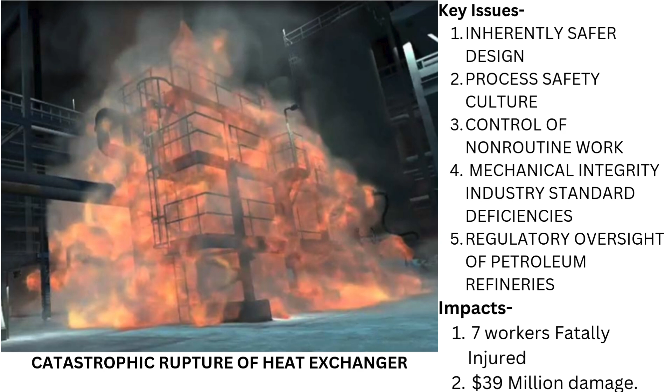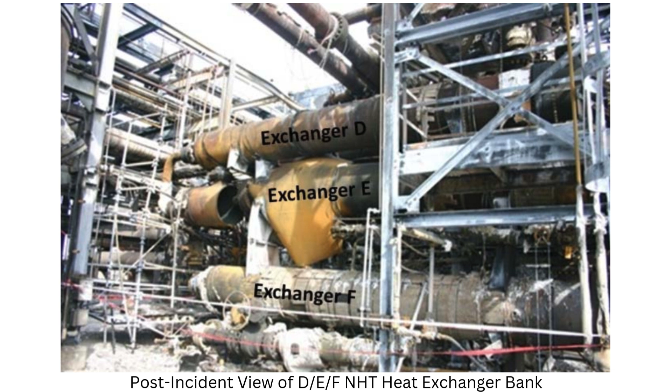On April 2, 2010, a catastrophic explosion rocked a refinery in Washington. A ruptured heat exchanger in the Naphtha Hydrotreater Unit, NHT, released highly flammable hydrogen and naphtha at over 500 degrees Fahrenheit, causing a massive explosion and fire. Tragically, 7 workers were fatally injured. The incident caused over $39 million in damages and is one of the deadliest refinery disasters in history.

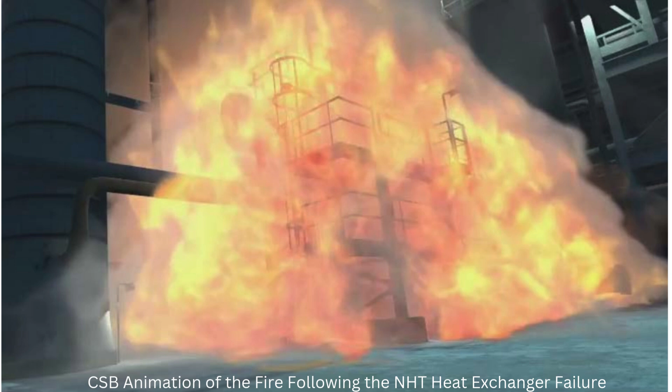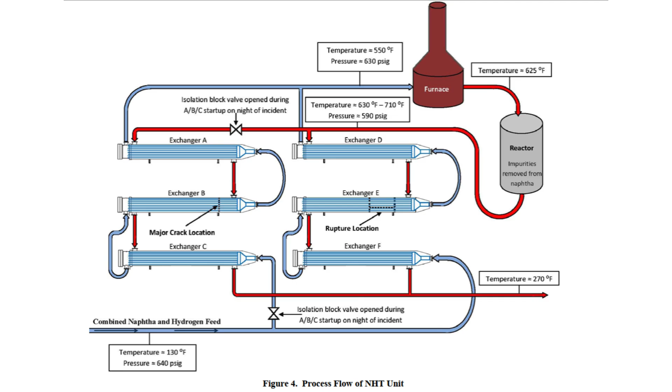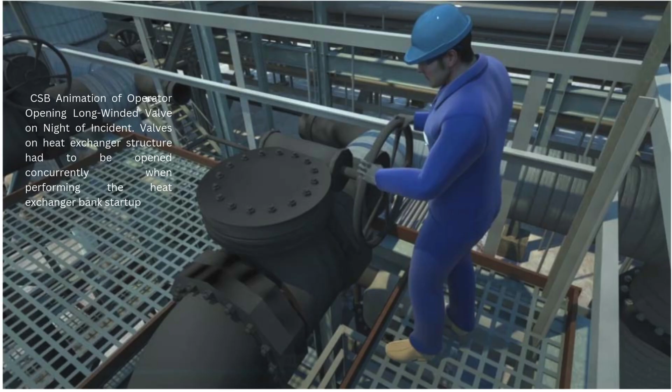What happened? On March 28, 2010, the A/B/C heat exchanger bank was taken offline for cleaning, while the D/E/F bank continued operating. Cleaning was part of routine maintenance to remove fouling that reduced efficiency. On April 1, workers began restarting the A/B/C exchangers. These startups were considered hazardous and non-routine, with a history of leaks and fires.

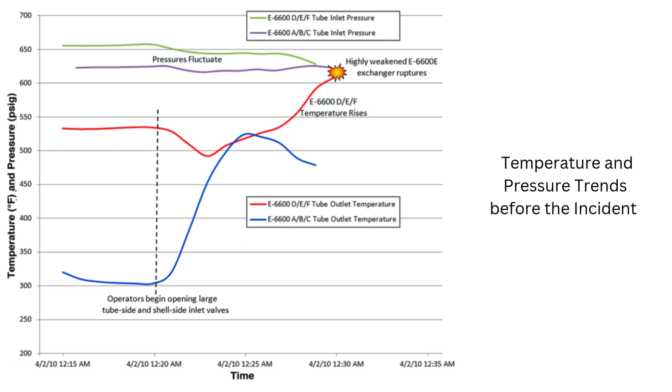On April 2, early morning, during the final stages of startup, workers manually adjusted valves to regulate the flow of hot naphtha and hydrogen. At 12:30 a.m., the heat exchanger in the D/E/F bank catastrophically ruptured due to severe high-temperature hydrogen attack, HTHA, releasing flammable gases that ignited. The resulting explosion and fire burned for over 3 hours, causing fatal injuries to 7 workers near the heat exchanger.

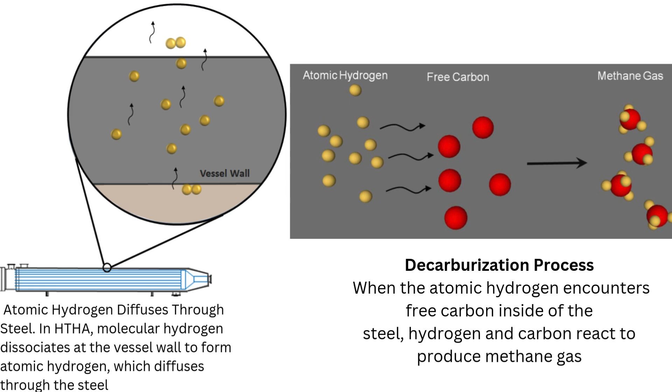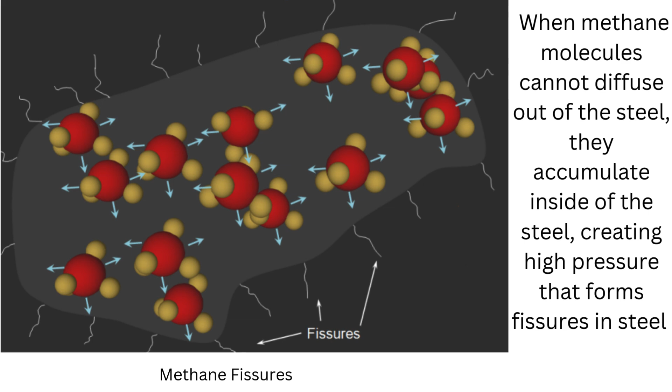What are the root causes? High-temperature hydrogen attack, HTHA. The carbon steel used in the heat exchanger was severely weakened by HTHA, leading to fissures and cracking. Inadequate safeguards: the heat exchanger lacked inherently safer materials like high-chromium steel, which is more resistant to HTHA. Inspection failures: existing inspection techniques were unreliable for detecting HTHA damage, and Tesoro did not measure actual operating conditions, relying instead on design specifications.

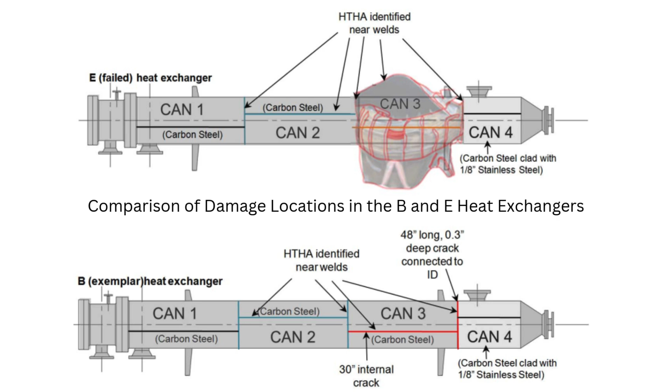Normalization of deviance: frequent leaks and fires during previous startups were treated as routine, with no effective measures taken to address the underlying hazards. Ineffective process hazard analysis: PHAs failed to identify and mitigate HTHA risks, and workers were not adequately trained for non-routine operations like heat exchanger startups.

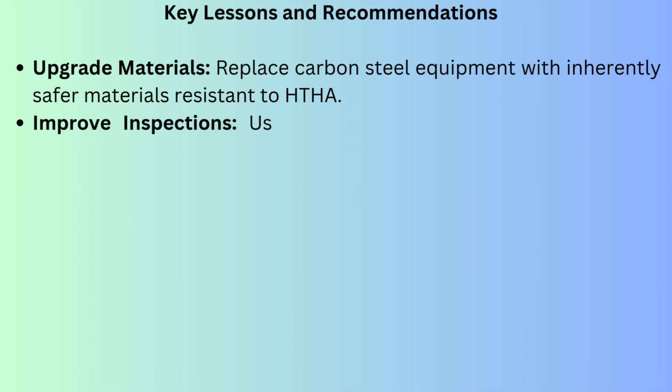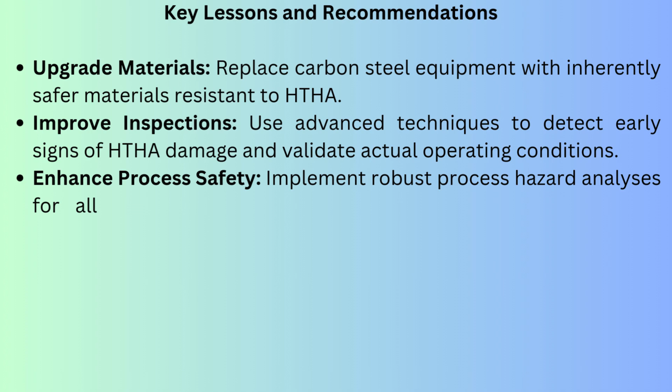Key lessons and recommendations. Upgrade materials: replace carbon steel equipment with inherently safer materials resistant to HTHA. Improve inspections: use advanced techniques to detect early signs of HTHA damage and validate actual operating conditions. Enhance process safety: implement robust process hazard analyses for all hazardous tasks, including startups, and limit worker exposure during such operations.

Adopt inherently safer design: incorporate design changes to eliminate or reduce reliance on hazardous processes. Regulatory changes: strengthen industry standards, such as API RP 941, to require safer materials and enforce minimum safety requirements.